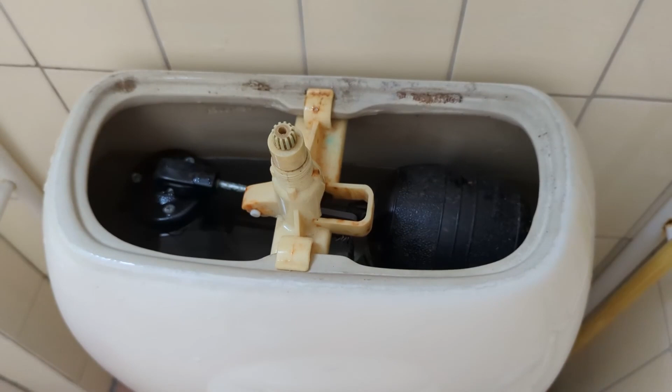Our old pull-type style toilet stopped working. Watch how I used 3D printing to fix it.

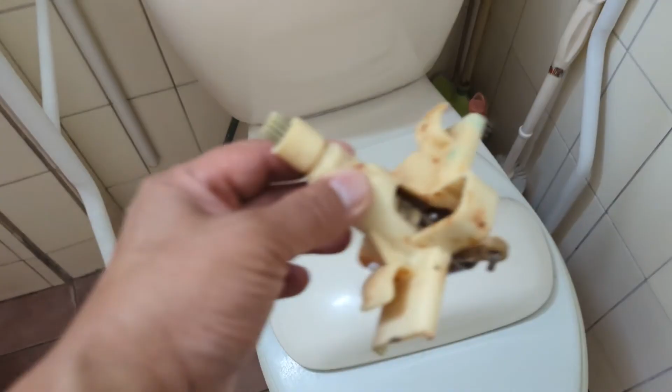Our toilet no longer flushes, and this is the working mechanism. There seems to be a broken bit of plastic on the inside of all of this, so I'm going to open it up and take a closer look.

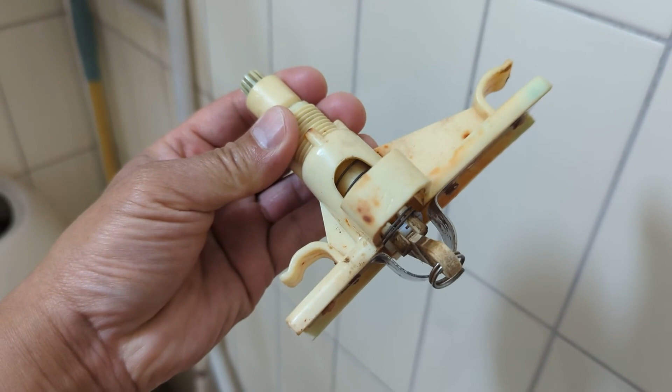I removed this arm piece, pulled out this pin, and this came out. As you can see, there's a crack right there. So basically this pin I'm pointing at should go in this hole here in the middle, but it slid out through this crack, and it's about to break through on the other side too.

After many decades of use, this part is finally breaking. I was thinking of gluing it or sealing it with epoxy, but I don't think it's going to hold. This piece feels pretty fragile. So let's make a new one with 3D printing.

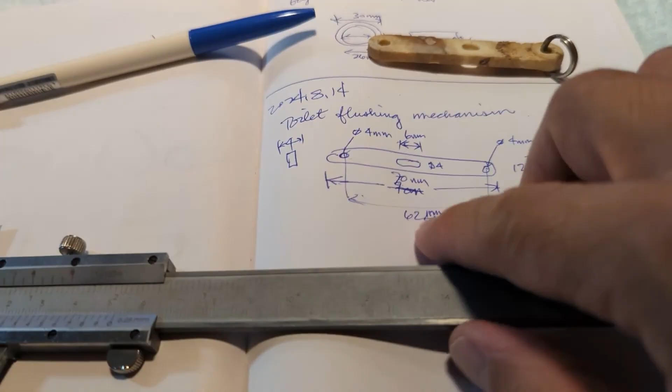I took some measurements, made a brief sketch, and this is what I modeled. So I'm going to go ahead and load this up in my slicer and then print it out on my 3D printer.

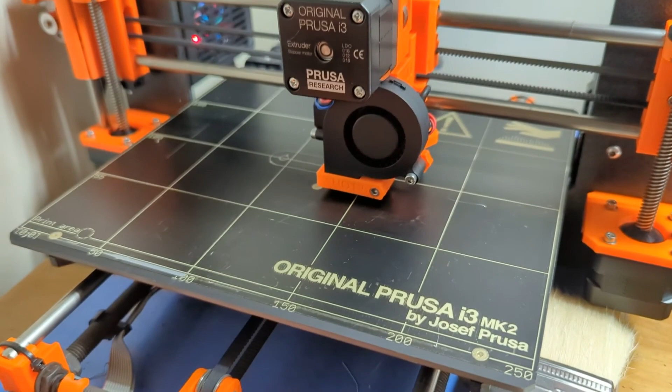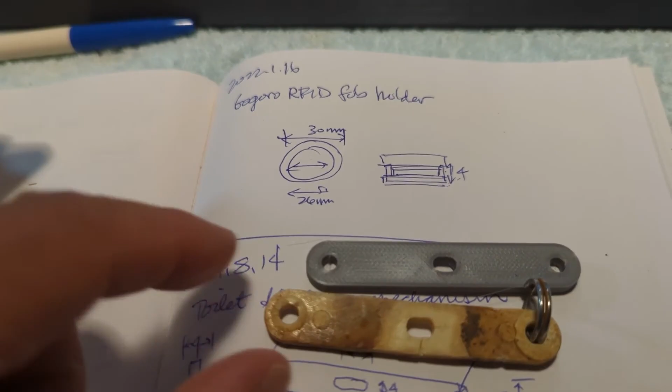I printed out the first prototype, and this is it. The holes are actually a little bit smaller than what's in the actual bar here, and I discovered a slight problem — I am going to have quite a bit of difficulty getting that center pin into the center hole.

This thing basically won't allow me to take that pin out. It's a solid metal piece here, and the plastic has basically been fused or melted to keep this metal strap in place, and I don't want to go through the trouble of taking all this off and putting it back on.

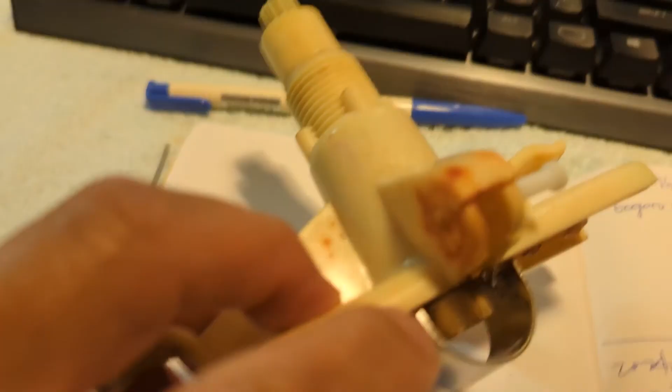So what I'm going to do is redesign the part so there's an opening at the bottom here — the pin will just slide in there. I don't have to take out this center pin, and hopefully that will still do the trick.

So what this does is basically get pulled up and down. This ring will pull on the valve that controls the water that goes from the toilet water tank into the bowl. I think once it pulls up, it can just flop down on its own by gravity.

Let's see how this works. Well, I didn't expect it to, but this metal piece came off pretty easily. I'm just wondering if it's going to stay in place when I put it back in.

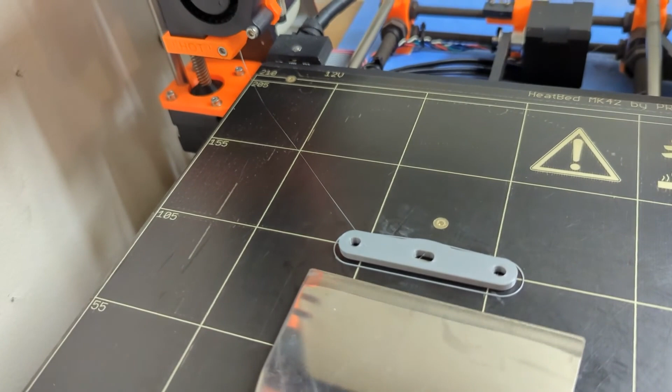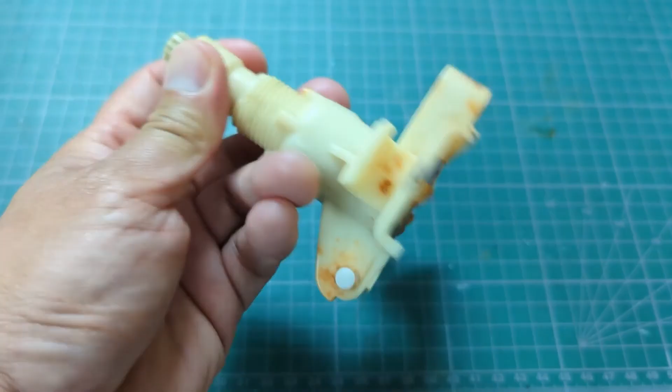So we have the original part, first prototype, second prototype, and hopefully this is the last and final part I'm going to use. Let's put it in and see if it works. And we have the part installed, and I think this is going to work.

Okay, let's put this back into that old toilet. Here is the part fully installed, let's see if it works. And it does. Fantastic. And one more test for good measure.